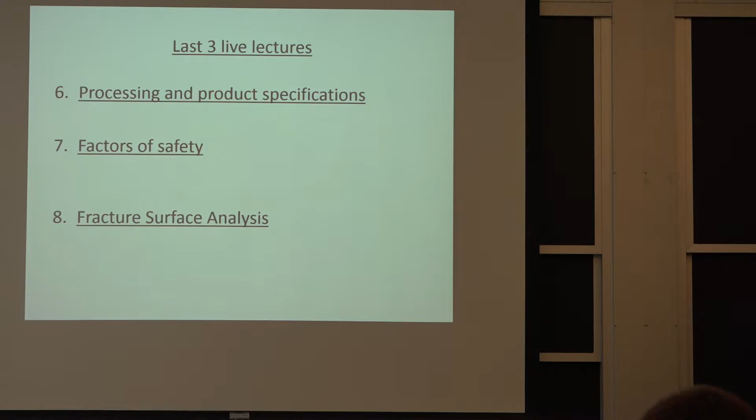All right. So what we were saying is we'll finish the processing and product specification. Tomorrow we'll talk more about factors of safety. What I've tried to do was to blend in a lot of failure analysis through the lectures. So on Friday we'll go over it specifically, and I'll bring some fracture surfaces for you to get a little bit of a sense of how that is. But hopefully the general topic of failure analysis got through the lectures in general.

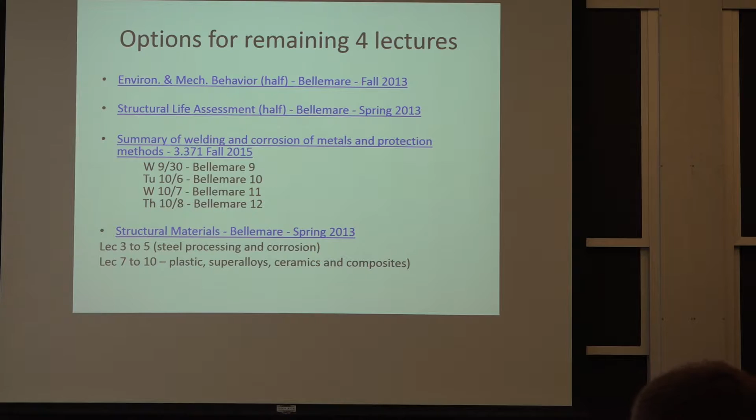This semester I'm doing 8 lectures, so for the remaining 4, I give you 4 or 5 different options of different things you can look for if you're interested more in welding, corrosion. There's a section on plastic and composites that may be interesting. And if you have anything in mind that is not here, you can do that as well. If you say, oh, I'm going to just do a few lectures on welding from Dr. Eagar, that's perfectly fine.

We touched last time on different designations, and the AISI SAE was one of them. We talked about a 1020 steel, a 4130 steel, essentially speaking to the chemistry. So how much carbon there is in it. It doesn't even really have requirements for maximum impurities. So it's really just for alloying elements. If you want a little bit of chrome in there, HSLA steel, for example, that will come into this chemistry designation.

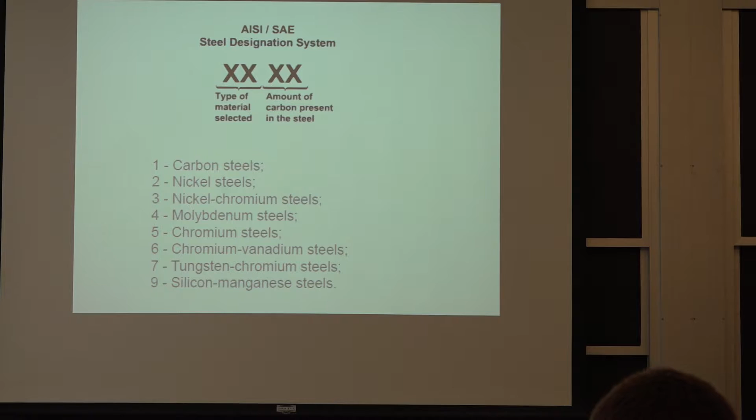But if you remember, we said if you go to an ASTM standard, a lot of times it's more robust because it will include requirements for mechanical properties, some maximum of the impurities. It will tell you to calculate a carbon equivalent, so it's weldable if you want a weldable grade. So there's just a lot more information and usefulness that you can get out of a performance-based specification. But it's good to know the chemistry specification.

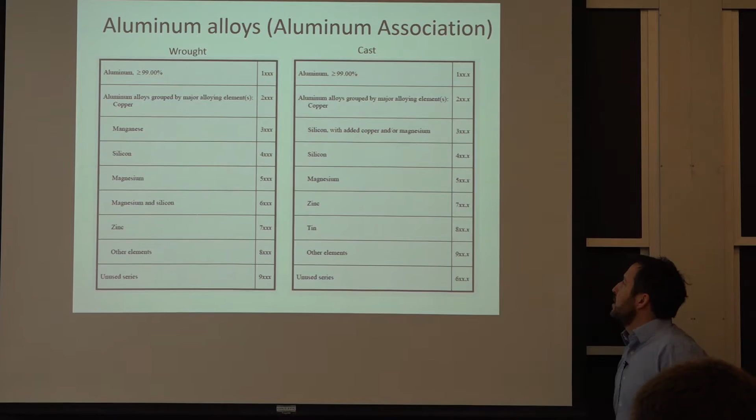We went over it for the aluminum alloys. It's 4 digits for a wrought product, 3 digits with a dot for a casting. And this page for the Aluminum Association designation may be useful to you. So if it says F after the chemistry, it means as fabricated. O is for annealed. You could be strain hardened; these are the 3000 and 5000 series alloys. And then if you have a heat-treated grade, a lot of times it will have a T there and either 2 or 4 digits after that. So you know a little bit what you're looking at.

If I have a 6061 T6, for example, which is very, very common, it means when I'm going to weld it, I will lose a lot of that heat treatment. And that's why for some applications, if you're thinking about performance boats to go on the ocean, they'll tend to be 5000 series aluminum without the heat treatment, and part of it is the corrosion resistance, and part of it is there's so much welding involved that it wouldn't matter. If you try to use a higher strength, you're only going to get the strength of the weld metal.

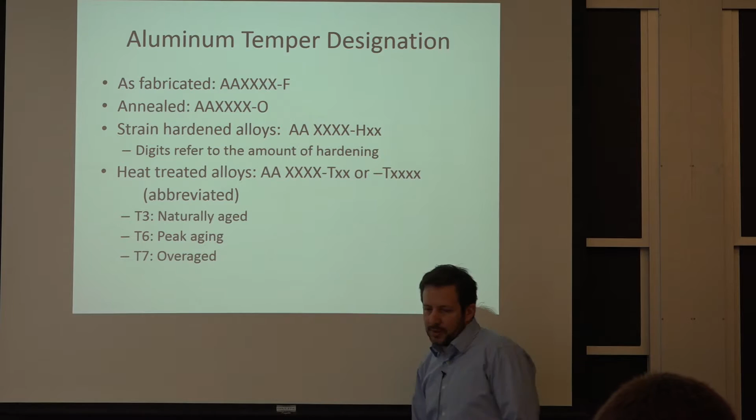We didn't go too much over the different heat treatments. T6 is the peak aging, but there are situations, if you have rivets, for example, to build an aircraft fuselage, it's very interesting how a lot of them work. You do the solution treatment, so you heat them up and quench them, and then you keep them in the freezer so they don't become harder.

In other words, at ambient temperature, they will age and become harder. There's going to be a dispersion of precipitate forming, and to delay that, you keep them in the freezer, you install them, and just the strain of deforming activates this transformation of forming precipitate. So within an hour after installing the rivet, it could be as much as twice as strong in terms of yield strength than beforehand.

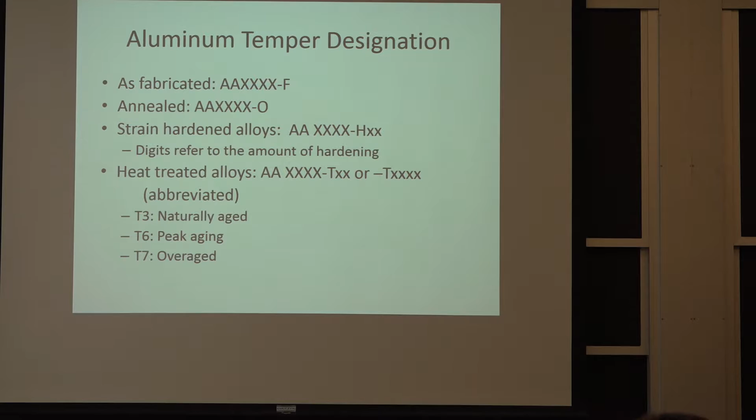And so you take advantage of the low yield strength for formability, and then it gets harder from the action of work hardening, but mostly the formation of the precipitates at the higher temperature, and it is improved by the deformation. So essentially creating all these dislocation networks during deformation helps with the formation of higher strength precipitates for hardening by precipitation.

It's a lot. If going across the country is 3,000 miles, then you do that 100 times, that's how many transmission pipelines we have. And if you include distribution, which means everything in Massachusetts to bring natural gas to Cape Cod and everywhere that we want it, you're talking about 2 million miles. So it's an incredible amount. Most of what is in transmission pipelines is still steel. When you go to distribution, since the 1980s, we're mostly using HDPE, so high density polyethylene.

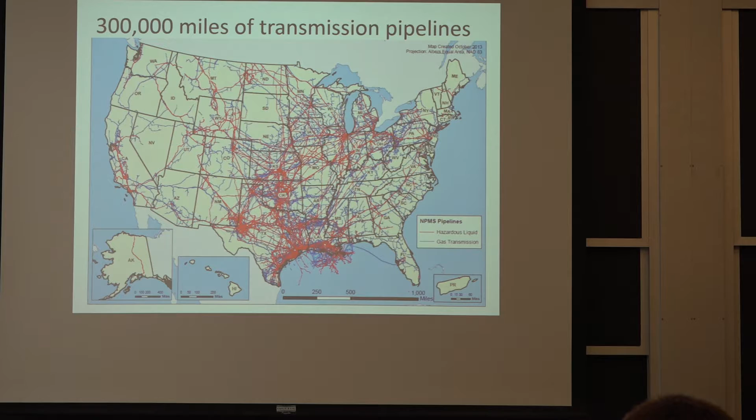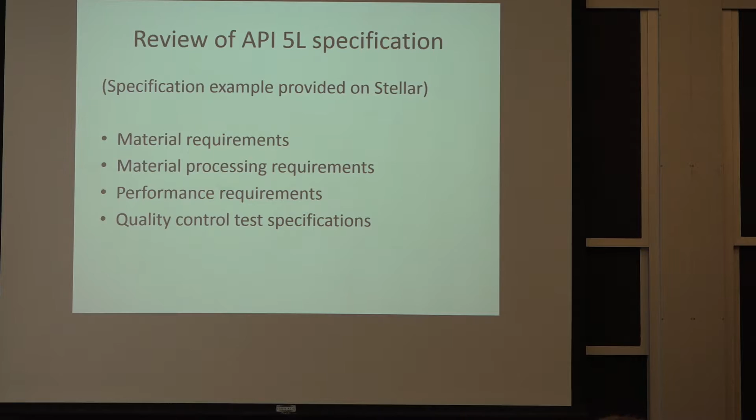So with respect to the pipes, it's a specification from the American Petroleum Institute that is most widely used. It does include what we call material requirements, so chemistry, it has some processing requirements, performance requirements, and quality control. And it has changed a lot over the past 80 years. And that speaks to one thing I said, that it's very difficult to start a new product from scratch, saying I'm going to design this without taking into account other things that are out there, because there's a lot of history and trial and error to get a standard that, first of all, everybody understands, that everybody can use.

What happens a lot with making standards for materials is you have to get together the users and the manufacturers, because I can be there as a design engineer saying, well, I'd like my pipe to not have any welds, for example. And the manufacturers say, well, I could do that for you, but there's going to be a lot of limitations. I'm not going to be able to have a good tolerance on wall thickness. So if you have a seamless pipe, it means that you really are extruding out the inside from a billet, and the end product is just very, very hard to maintain a good wall thickness tolerance. And it's more expensive.

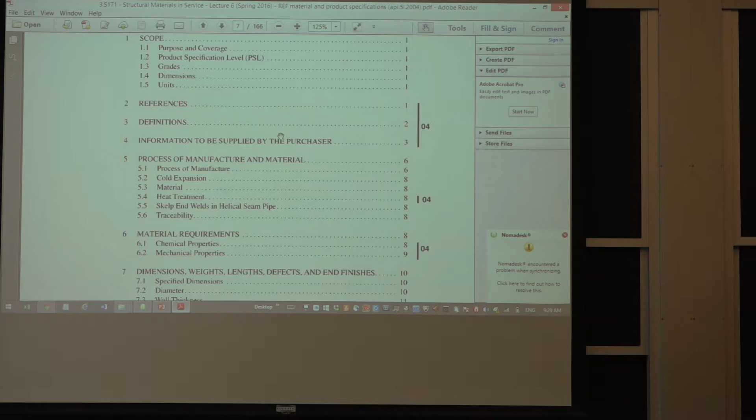So the people have to get together, and this is a big example again for the industry because of the amount of steel and how critical it is. And I posted it on Stellar, just so you can get a sense of an example of a specification. We won't go through the details, but you can see here, it will tell you a little bit about different ways you can do a cold expansion. You may or may not have a heat treatment.

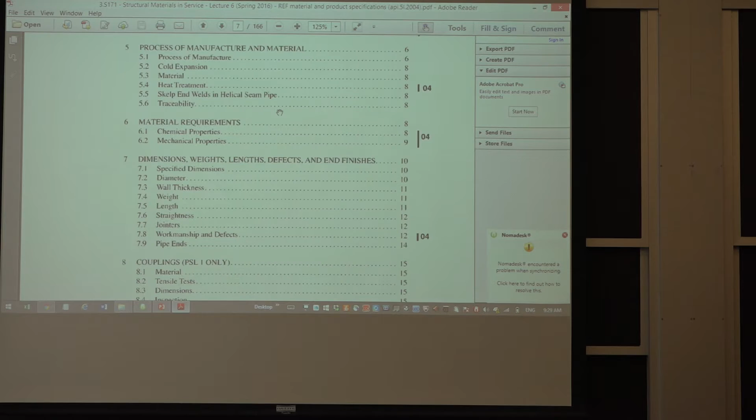So one of the difficulties with a specification like this is a lot of times it will give you a lot of options. So it's not clear if you're the user that you're getting exactly what you want if you don't put additional requirements. So the specification here will give you so many ways that you can do the welds. One thing that we didn't talk about is these pipes for cost purposes. I mentioned seamless, but the majority of them, maybe 90% of them, are made from a flat sheet that you roll, and then you have a longitudinal welded seam all along.

Yes? Did you say they're now made of high-density polyethylene? No, so this one is for steel. So this is for transmission pipelines. The high-density polyethylene is for distribution. There's distribution and there's transmission.

Transmission is essentially between states, more or less. It's higher pressure is how they define it, and then distribution is more within state when you go from the major hub. So there's only going to be one transmission port in the region, and then it gets distributed using smaller pressure lines. And so is that because the steel is cheaper than the high-density polyethylene?

That's a very good question. So for the videos, the question was, why are we using steel for transmission? And it's higher pressure. So if you wanted to try to get this level of pressure with a plastic, first of all, the wall thickness would have to be very, very significant. So in terms of joining and just the practicality of putting it together, it's not worth it.

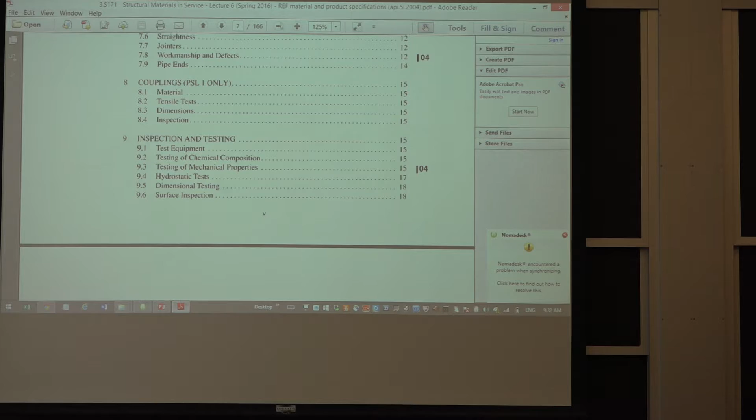Going back to specification per se, you see they will talk about couplings, inspection, so you have a hydrostatic test that needs to be done on those pipes. There's a certain amount of dimensional control. So all these things that you could say, I'm going to just say what I want, is built into the specification to some extent. So again, there will be options on grades.

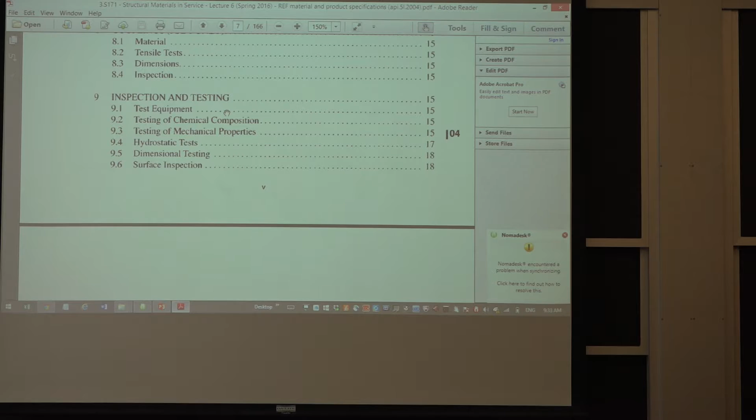What we're going over right now is API 5L. There will be different strength levels listed in there, and there will be different types of coupling that you can use, so you have to specify exactly what you're looking for. And the document is 166 pages. So that's why doing a detailed design can take a long time, because before you decide whether you want to use that API standard or an ASTM standard or come up with your own specification, you kind of have to go through what's in there.

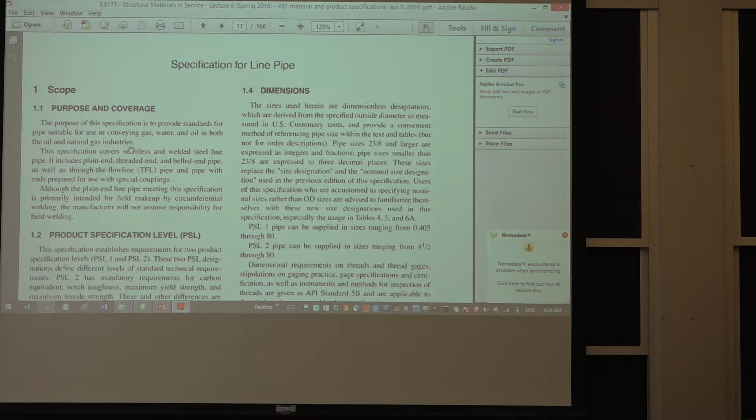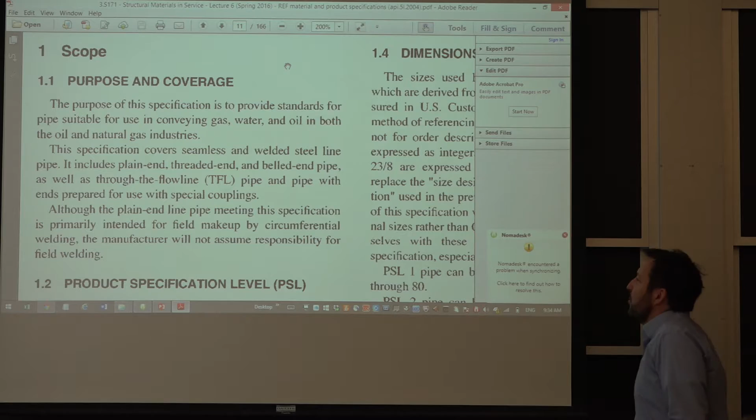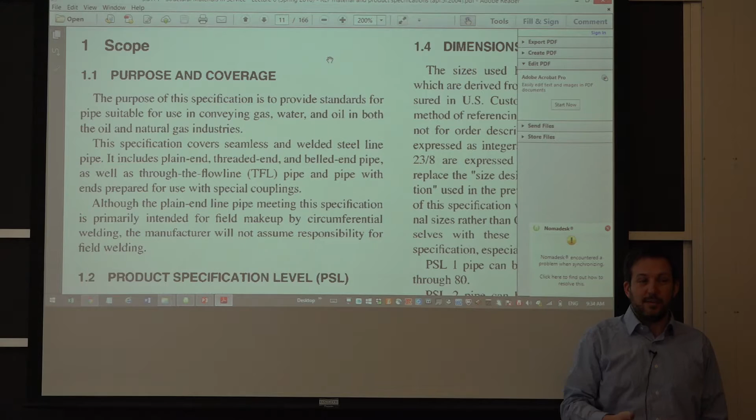They will tell you a lot in general about what they're trying to do with the standard. A lot of times I find it very useful to just read the first paragraph, because it contains more information than you would think. So here it says, for example, we cover seamless and welded steel line pipe. So it means that when I call for that standard, I don't know if I'm getting seamless or welded. I have to determine that. I have to tell them if I have a preference, because the standard is for both.

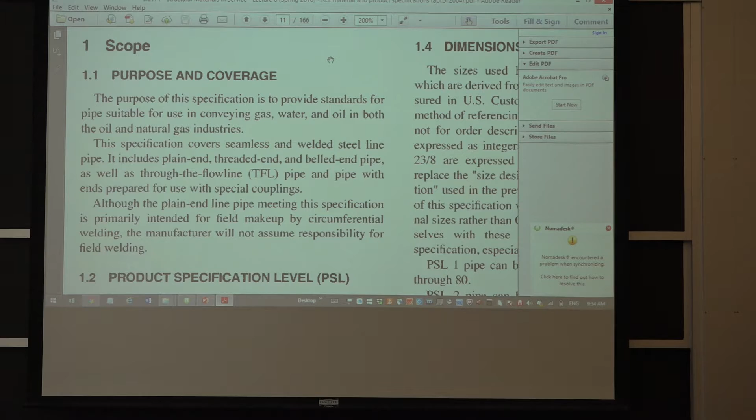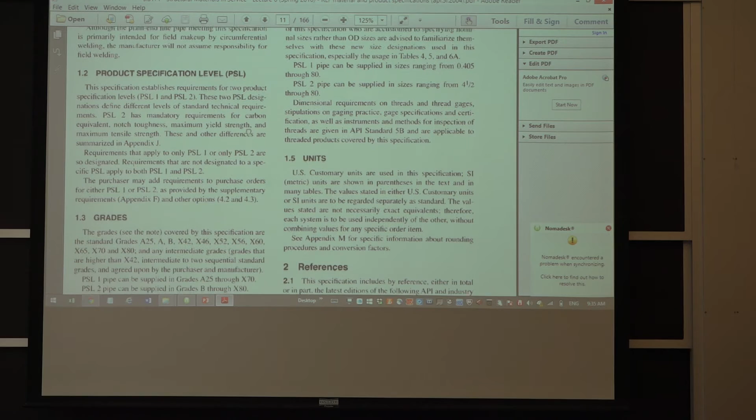There will be standards sometimes that are more specific, that will say specifically, this one is for seamless, so you don't have to specify it. But in the case of API, it's often the case that there's a lot of flexibility in the general standard. Now they're talking about quality levels, and here's the discussion about grade.

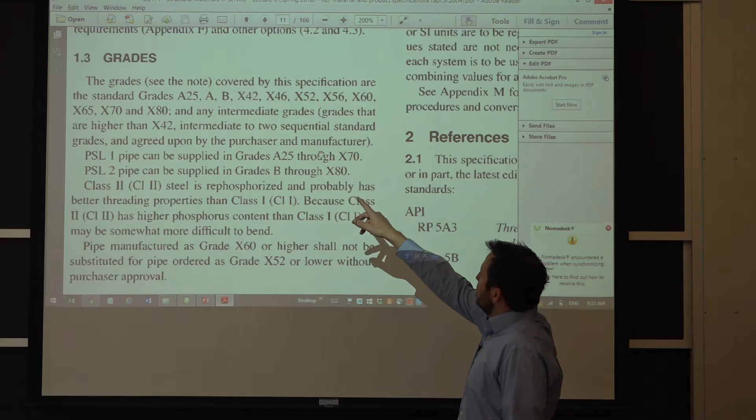And it's a little bit distressing, I guess, to think that the same specification is going to give me the A and B grade. And I'm sorry, this is the specification, so it's all in PSI and KSI. So the grades there are in thousands of PSI. So the lowest grade you have for those steels is 25,000 PSI. The 42,000 is very, very common, and that's what they call the X42 there.

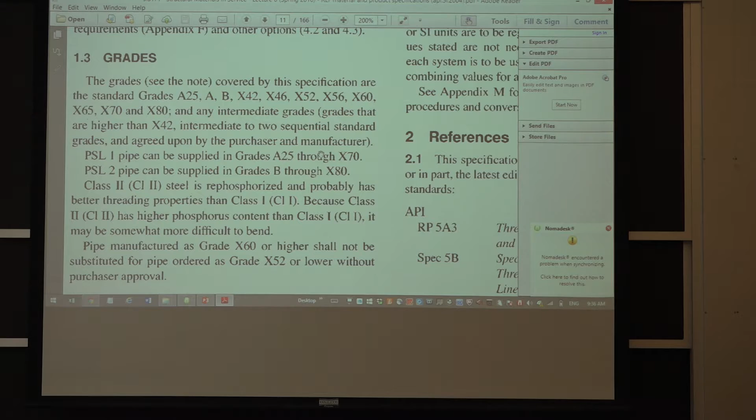And then the more modern steel, if you're putting a pipe in the ground right now, you could be looking at an X65 or something like that. The trouble as you go to 65 is how you're going to weld it and still maintain the same properties. So the same issue comes over and over again. And that's why a tight control over chemistry becomes important.

I had a discussion yesterday on this, essentially saying, well, sometimes we'll ask for the X65 steel, which sounds like a good idea, so I can have a better usage of the steel, use a higher pressure for a certain wall thickness. But depending on the detail of the chemistry, when you weld it, it will soften.

Why does it soften? Instead, the mills decide that instead of investing in chemistry, they do a little bit of cold forming of the steel to be able to meet the specification, but it's not helping with respect to the as-built properties. And there's nothing in the specification that says you're not allowed to cold form. You could add that. You could say, I want an API 5L pipe that is normalized. Great. So you know you're not going to have this cold forming.

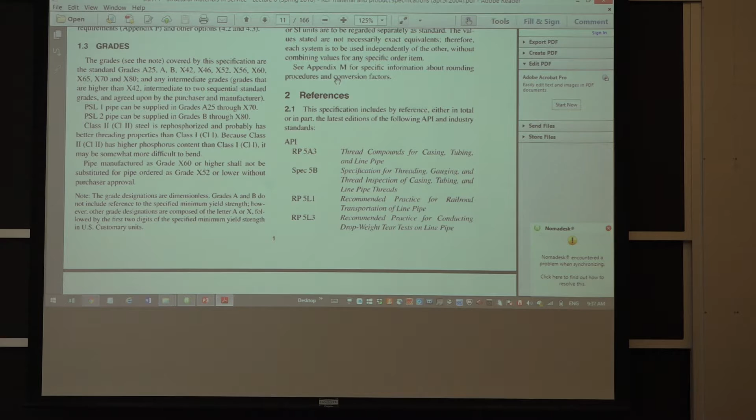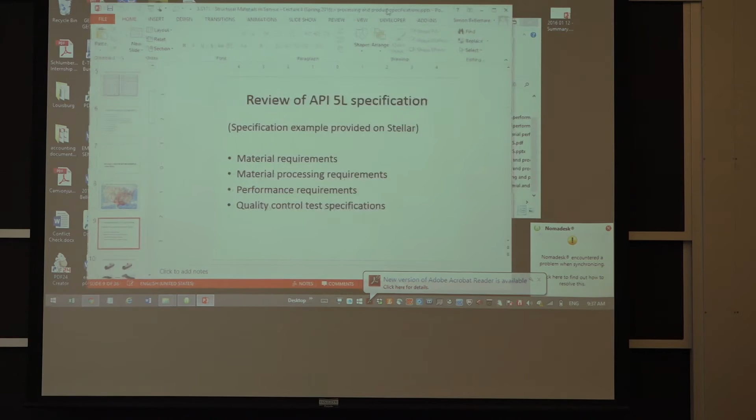I hope that this hour or so that we spent on this makes you think that if you don't ask for it, you may not get it. You may be lucky to have somebody that's going to think ahead and understand your application and what you're trying to do, but a lot of times it won't happen.

Yes? What is a full specification? A full specification for a material or a design? Material with properties. So I guess design is one thing, with the drawing. Yeah. Specify on that drawing the material type. Yes. Okay. It's a very good question. So if I'm trying to be very careful in specifying a material, I have the drawing that says this is my tank, and you have a little note that says the material.

Coating is just completely different than the material. But with respect to the material, on the drawing, a lot of times you'll have a designation that will say ASTM, certain grade, certain chemistry perhaps, because you can include the chemistry in ASTM as well. And that's a good way to do it because now you're combining mechanical requirement with chemistry requirement. The same way here on API, if you say I want an API pipe, but in addition, I want the chemistry to contain a certain amount of nickel, for example, that really builds up your safety level.

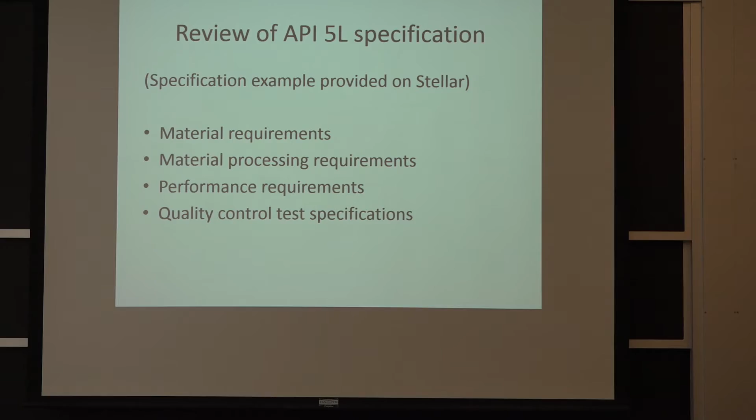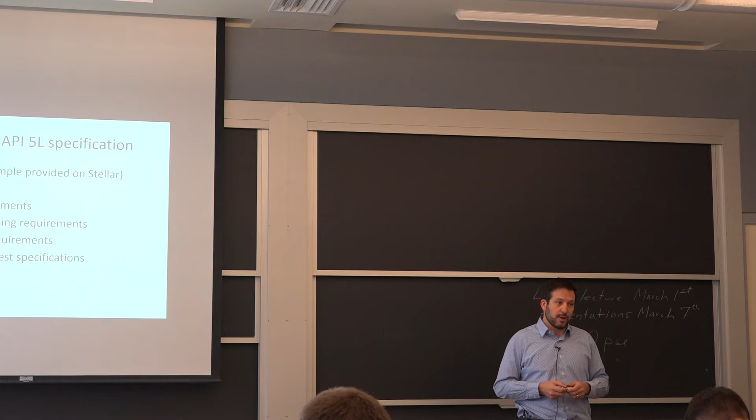So if you refer to a product specification, and we have plenty, like this fitting, for example, has an ASTM just on it for dimension, for testing that needs to be done on it, for the material to use. Now, there will be options. They'll say, in terms of material, I give you 2 or 3 options, so you have to say which one you want. So it's the most prudent approach to call for a standard, but understand that standard so you know what is optional and what is required. Thank you.

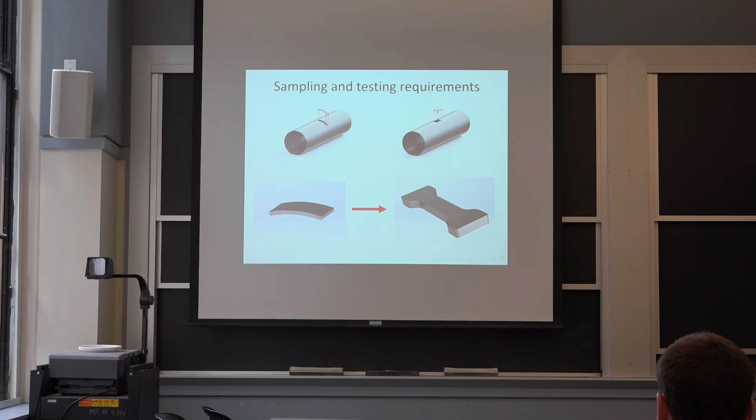And speaking of understanding what's required, I mentioned those pipes that are made from flat and then bent into shape. The standard, the one we were just scrolling through, tells you to test using a circumferential cutout, flatten it, and then do the pull test. Does it make sense? Good question. Maybe we'll all agree here that it makes sense because you are interested in the resistance to a hoop stress. So you're more interested in the expansion resistance of the pipe than you are about the longitudinal properties.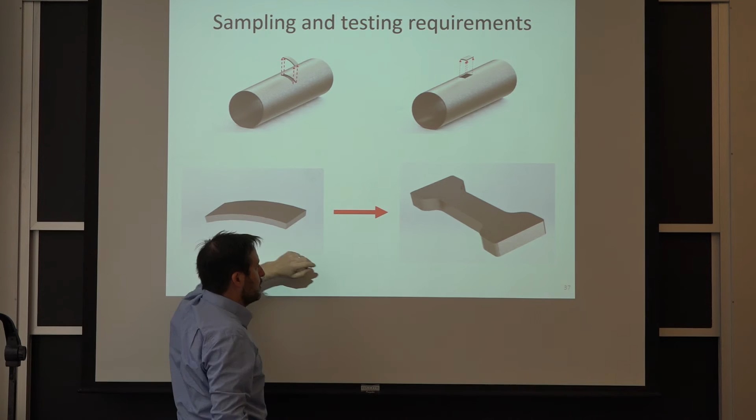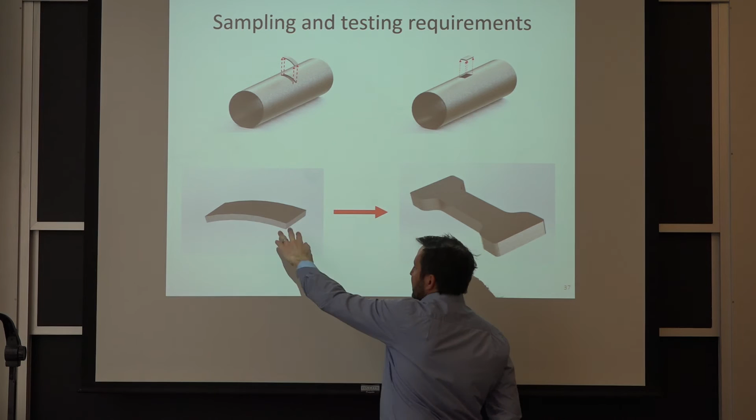The counter side to that is you started from a flat sheet to make that pipe. So you had some cold forming involved on the surfaces. Then you flatten it back, you have more cold forming. So here is a composite response that you're getting from your test from all this forming history and the material itself. Which way is better doesn't really matter in the end because you have to meet the specification. Now, it becomes important because people criticize this technique: depending on how you flatten it, if you use a lubricated tool or if you're just doing it dry, you'll get a different response. You actually get different properties.

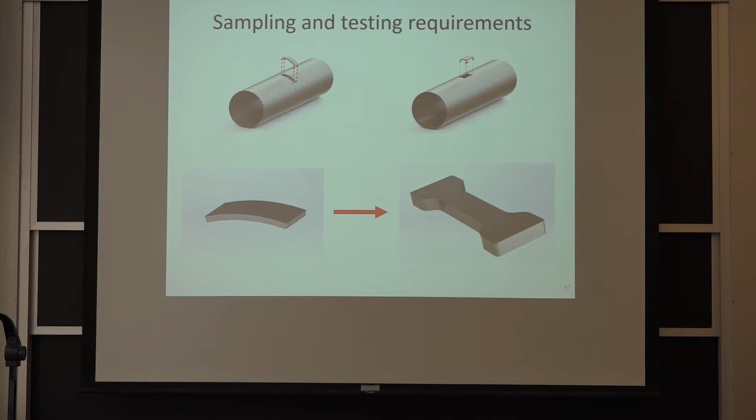So there's pressure to move to try to take a longitudinal sample and essentially give you a lower bound, a lower value of that yield strength, because now you don't deform it back and forth. But it's one of those things that, again, even if the standard is super thick, it's not perfect. And that's why understanding it is important to any engineer that's going to define it.

So I think we've covered the very basics for chemistry and mechanical. And you asked about coatings earlier, and that's a topic I want to briefly cover. The fall has more detail on corrosion. So here we'll just say that when you ask for something galvanized, it could mean very different things.

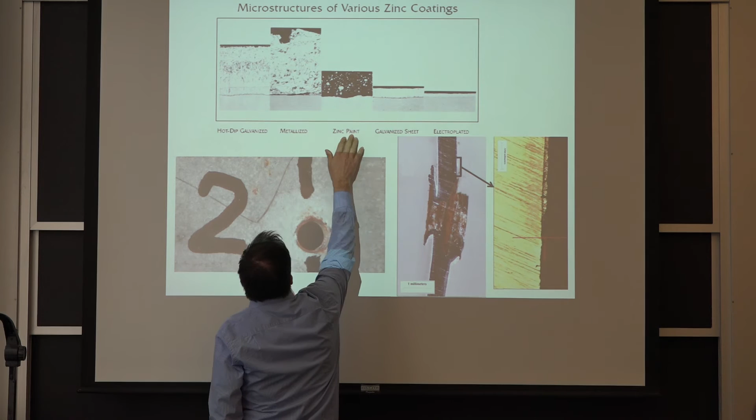Electro galvanized, these are the fasteners that you can get at Home Depot. They'll work for a few days. They don't rust right away. It's great, but it's a very, very thin coating. There's, of course, a difference in the service life of having these cheap fasteners, the galvanizing that you have on the body of a car, and then what is the hot dip galvanized or sprayed on zinc that is a lot thicker. It becomes important in a lot of applications.

This is an example of just a screw showing that when you drill the hole, you expose the galvanizing, and that itself leads to some corrosion. The idea is to control that corrosion, to protect that hole from growing. This is real trouble if it's the structural steel holding the entire cladding for the building. So we have that on Stata Center, for example, different layers, and then there's one piece holding the other. So if you lose metal around that hole, you lose the thread, everything falls off, no good.

What happens here is when it's drilled in place, that's very, very common. So you have self-drilling fasteners, you have your sheet, and you just go wherever you want and install the sheet. So you can use the galvanizing in the vicinity of where the exposed metal is, but that vicinity is of the order of 5 or 6 millimeters for condensation. So in other words, if you're not submerged in water, the cathodic protection effect of the zinc can only go so far. It will only go to the extent of a film or a droplet of water, and that's millimeters.

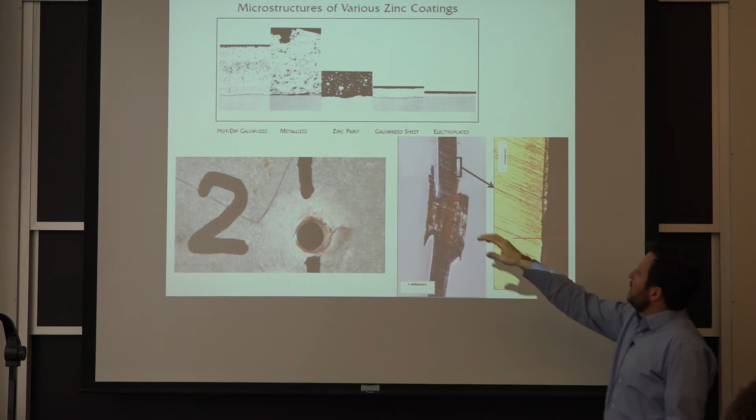So it's a very good example of an application where if you expect a lot of moisture and you're thinking about long-term service, you can't use these thinner electro galvanized samples. And of course, they're a lot cheaper. And also, if you're looking at bolts, if it's hot dip galvanized, so a very thick coating, a lot of times it's hard to put the nut on because you built up the thickness, so it's interacting with the thread. So there's a lot of limitation if you have a fastener.

And one example is screws for decking. If you have a hot dip galvanized fastener, it's a lot harder to drive it into the wood. It's hard to get a very square head or a Phillips head that will just grab with the tool to put it on. So a lot of times you end up with a hexagonal lag bolt type feature if that's what you're specifying. So it becomes important in a lot of cases to think about how you're going to protect it.

The chain that I circulated, one big problem with that one was you lose the coating. So it's going to rust there. Now, if it's an application in water, you can use cathodic protection. It's a perfect case to protect the areas that get scratched.

A lot of times when you have cathodic protection, by the way, we put that on all the big transmission pipelines. They're coated, and then they have cathodic protection for where the coating breaks. If you didn't put a good coating, you'll use too much current. It will really not be efficient to try to protect bare steel underground. But the idea is during installation, there's going to be some damage, and your coating is not going to be perfect. That's why you use a combination of the coating plus cathodic protection. And that was the case for the storage tanks that we talked about last time as well. It was coated plus cathodic protection.

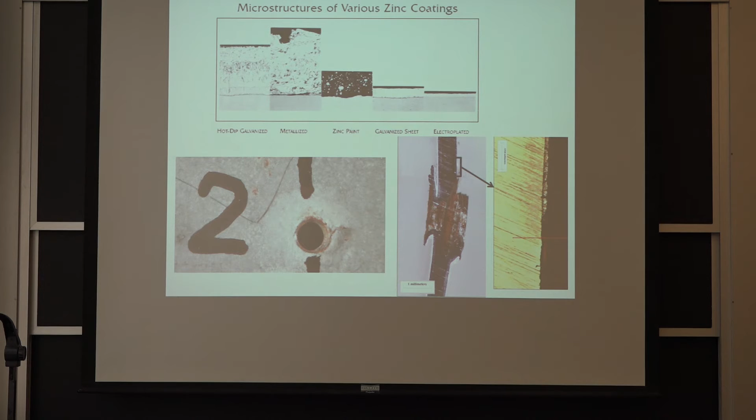Yes? Can you explain the cathodic protection? Sure. Yes, it's hard not to get a little bit into it. So we have the anode and the cathode in corrosion. So let's say that it's iron here. So we have a plate of iron, and we're considering forming a little hole in here. What happens is you get your iron to go into solution, and that's bad.

And then you have the recombination reaction that varies. So that's the reduction reaction. So you have an oxidation reaction, you have a reduction reaction, and by playing with the potential, you really eliminate this one on this piece of metal.

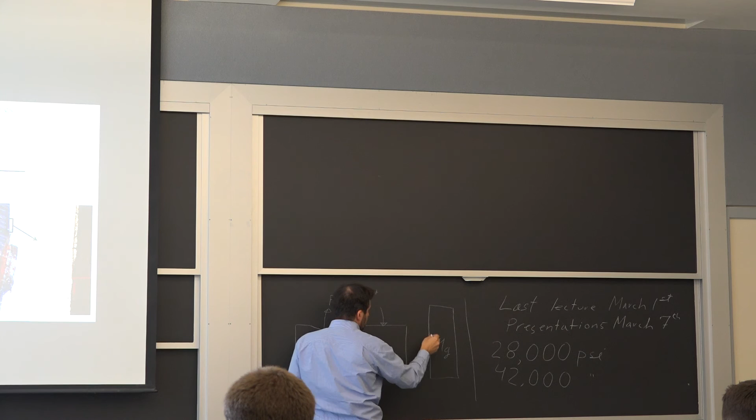So what happens is you have in the ground another anode. Let's say for an underground storage tank, you have magnesium. So you get the magnesium to get to the magnesium 2+, and then you still have the reaction of forming water or hydrogen here, so you eliminate this part altogether. That doesn't happen anymore. And this is the reaction that happens with the reduction taking place on the surface right there. So you transfer the action from the iron getting into solution to magnesium going into solution.

And the reason it works is this anode is in an electrolyte. So you need to be able to transfer ions through the soil or the water. So the only way that you can either have a galvanic corrosion, that was the other example I was going to show, or cathodic protection is by sharing an electrical path and through the electrolyte. If you have those two conditions, you can put it to your advantage or disadvantage.

Yes? So is that magnesium sacrificial then? In this case, it's sacrificial. You can have some permanent anodes, carbon-based, that will still have essentially a certain form of anodic reaction on the surface, and make sure that you do not have a reaction of dissolution. And the problem when you go to a permanent anode is there's a tendency to put a lot of voltage because you're protecting more, and that's where you start forming hydrogen on the steel, so it could be a big disadvantage. So zinc is great, can only get to 0.8 volt of protection. Magnesium can get you to form hydrogen on the surface as well.

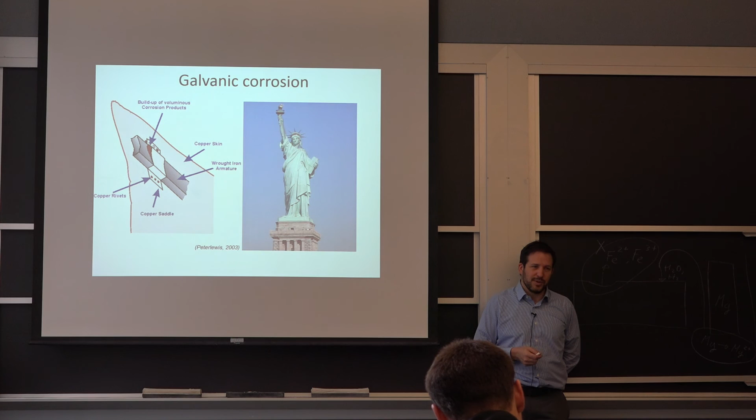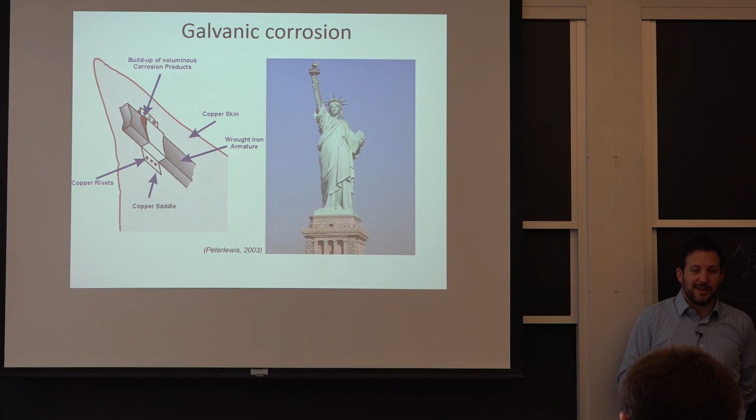If you have the opposite, if you have a steel roof for some reason, maybe weathered steel, you use copper fasteners, that's great because the smallest link and the one that's also not directly exposed to the environment is the most noble. So we use dissimilar metals a lot in construction, but we always have to be careful on which order we are. So the smallest element in general should be the more noble. So using stainless steel, for example, to put together aluminum is great. If you try to do the opposite, you could have a problem. So it's just a question of trying to think ahead what is going to happen long term.

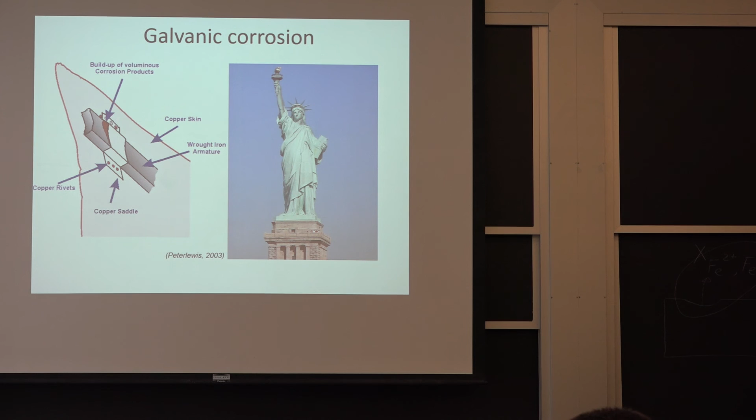Speaking of stainless steel, the word says it's stain-less, so it will still corrode under certain conditions. In the ground, it can corrode as fast as regular steel. So what we do about that, the different ways. So this is just flashing, and you have that on some museums, some fancy homes. Stainless steel flashing that because of exposure to the mist from the ocean just starts to pit and corrode. It doesn't really lose thickness, but it definitely loses the appearance. And one way to mitigate it was to put a very thin acrylic base coating on it.

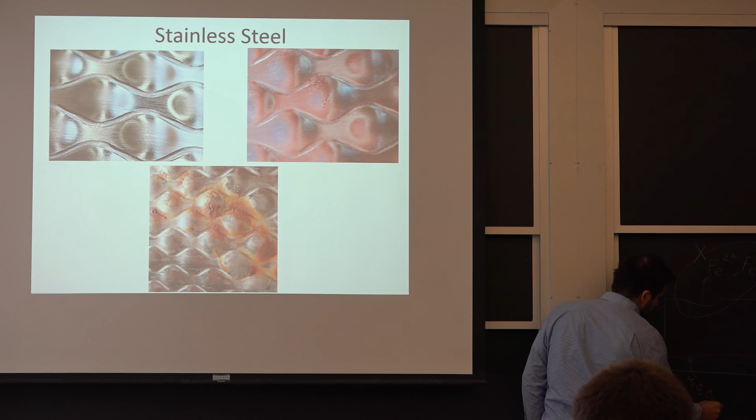And in the context of coating, just very briefly, you can pass those around. In the context of coatings, one advantage with coating a stainless steel, and we do that a lot with fancy stainless structures, is you don't need to protect against the oxygen going into the interface. So if you have steel here and you're trying to coat it, your real issue is moisture and oxygen travelling through your coating, because that starts the corrosion. You have spalling. It's not good.

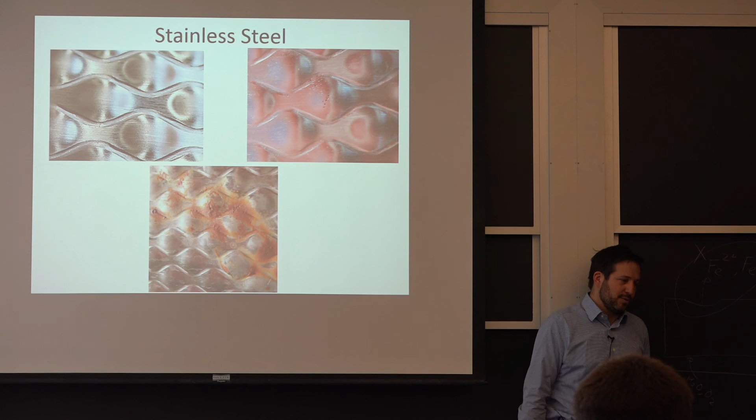The big advantage with stainless is you're only trying to prevent the chloride getting to the interface, because that's your main enemy to cause the surface corrosion. So you don't need as good a quality of coating to protect the stainless steel against corrosion, but a lot of times you do need something if you want to avoid it. And it's very hard to mitigate. That's these images here. You start finding these pits, you see the small holes there? So once it's done, you can try to clean it, polish it. If you still have the holes in there, it's never going to be as resistant as it was in the first place. So it's very, very unfortunate. A lot of people don't really think of this issue, but it does come into play a lot.